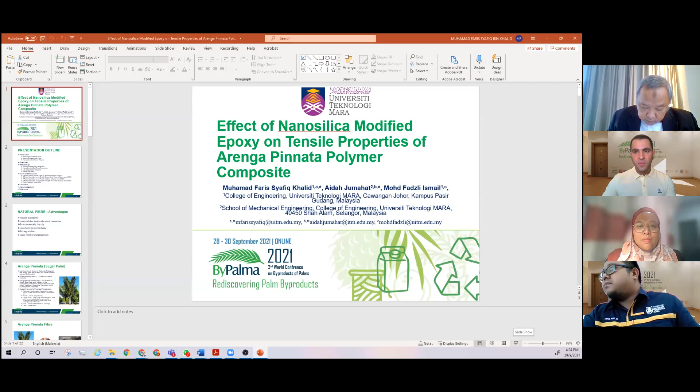Assalamualaikum and good day. My name is Muhamad Faris Syafiq Khalid. I learned about Arenga Pinnata, or sugar palm, also from UPM, Prof. My mentor at first is Dr. Abdul Hakim, who was my student also. Right now he's a lecturer at UITM. And in my master's, my co-supervisor is Dr. Jawahir.

All right, so I will start my presentation. With me is Associate Professor Dr. Aidah Jumahat, she's my co-supervisor, and also my colleague Mohd Fadzli Ismail. So my title is Effect of Nanosilica Modified Epoxy on Tensile Properties of Arenga Pinnata Polymer Composite.

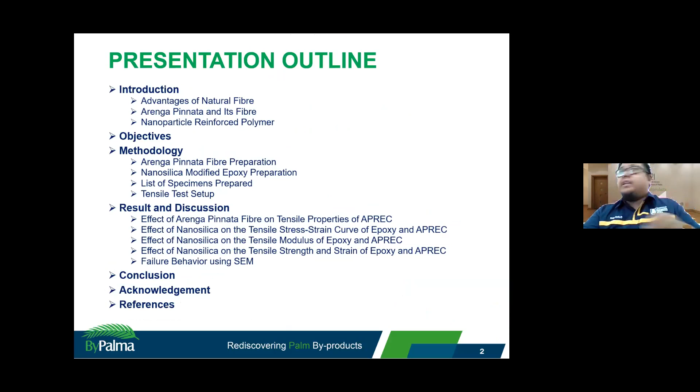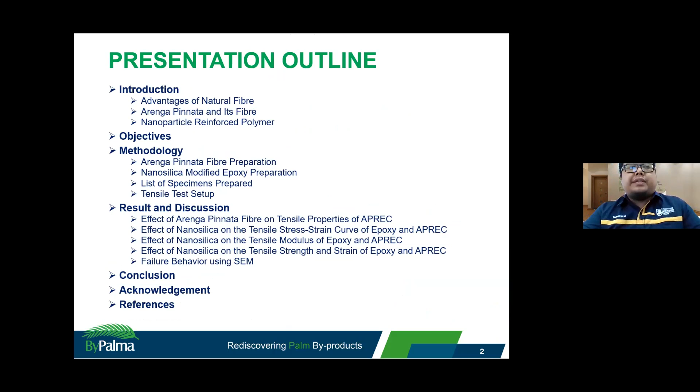This is a little bit on my presentation outline. We will take a look at the introduction, a little bit on the advantage of natural fiber and so on, and then methodology, results and discussion, conclusion and acknowledgement.

I will start my presentation with the advantage of natural fiber. Natural fiber has attracted the attention of researchers and manufacturers since years ago due to the advantage of having abundance of resources all around the world, which allow them to be acquired at low cost. It is also environmentally safe due to its biodegradable nature. It's also less harmful to the human body compared to synthetic fibers such as glass fibers. Besides, natural fiber has good mechanical properties and low density.

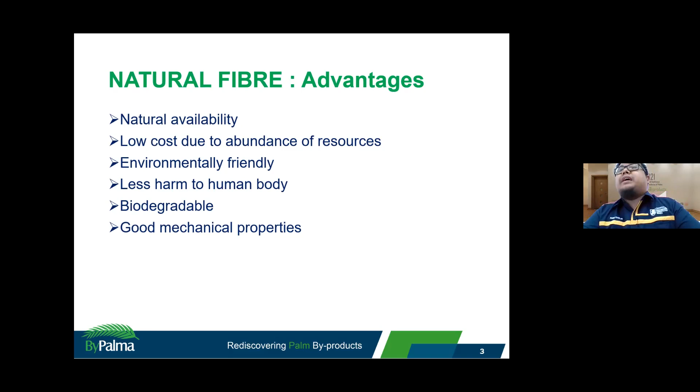On the Arenga Pinnata, it is a tree also known as Enau or Kabung in Malaysia, and popularized by the name sugar palm by UPM. At first I learned about sugar palm, and then it has several names. It is also known as Ijuk Aren, Injuk Anua, and 150 other different names in Indonesia.

It is a fast-growing plant which only needs around 10 years to reach maturity. For geographical distribution, Arenga Pinnata tree can be found from Southeast Asia and Taiwan to the Philippines, Indonesia, Papua New Guinea, India, Thailand, Myanmar, and also in Malaysia.

Some usage from parts of the Arenga Pinnata tree: first from the palm sap, we can obtain palm neera or fresh juice, which can be used to produce sugar blocks or crystal and brown sugar. From its trunk we can get starch to be used as a biopolymer. From its fibers around its trunk, we can get seawater resistant fiber, which we call sugar palm fiber or Arenga Pinnata fiber. It can be used as rope, broom, roof, substitute for geotextile fiberglass reinforcement, and underwater and underground cable.

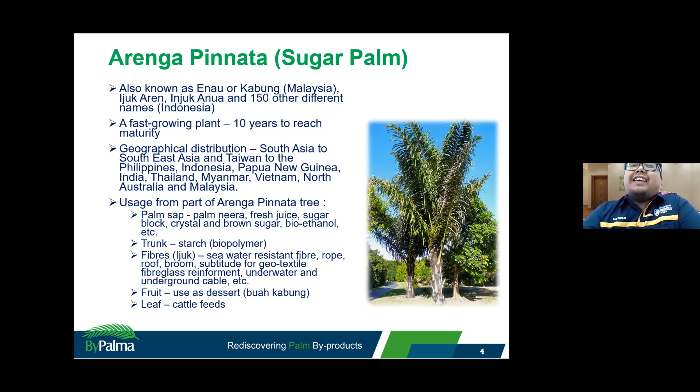From its fruit, we can use it as a dessert. In Malaysia, we call it buah kabung. Usually we put it in a dessert called lychee kang. And lastly, from its leaf, we can use it as cattle feed.

This is the Arenga Pinnata tree. As you can see in the slide, the Arenga Pinnata tree is on the left, and it produces black colored fibers all around its trunk as shown in the zoomed photo. The fiber has been harvested, prepared, and used in this research.

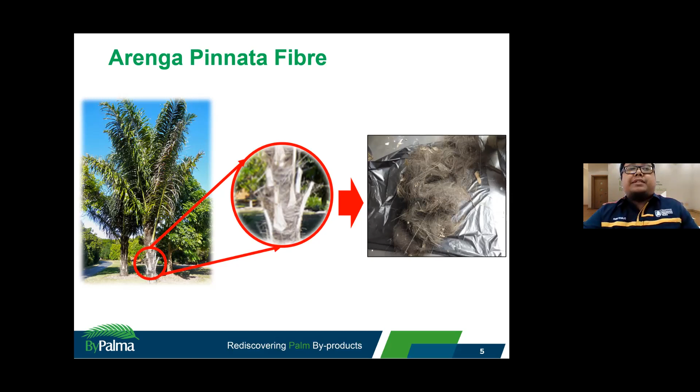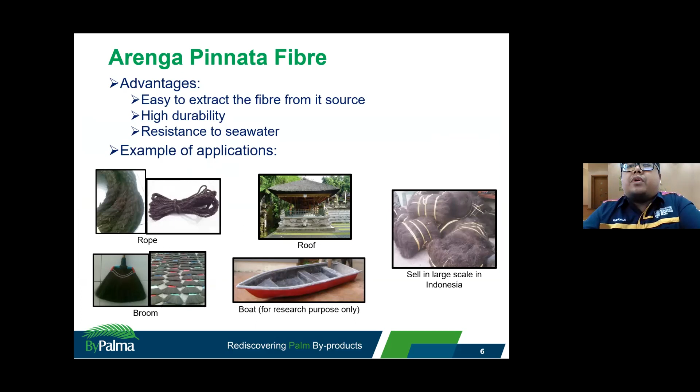Advantages of Arenga Pinnata are mostly known for its resistance to seawater, as mentioned in the keynote speech by Prof. Sapuan. It is also easy to extract the fiber from its source, and it has high durability. For example of application as of now, Arenga Pinnata fiber has already been used as a rope for thousands of years, and the fiber has also been used as roof and broom.

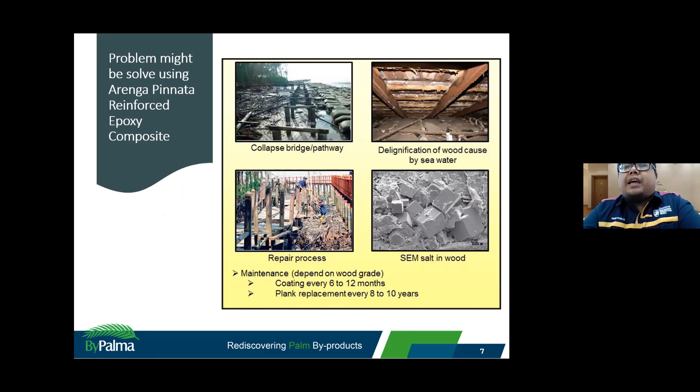So problems that might be solved using Arenga Pinnata fiber polymer composites, such as replacement for construction of wood bridges at saltwater areas because of its good properties. Currently, bridges and pathways made from wood need to be maintained frequently. We need to do coating for the wood around every 6 months to 1 year, and replace the plank every 8 to 10 years.

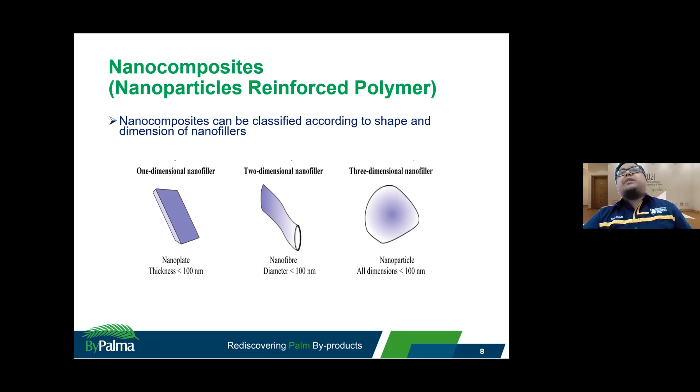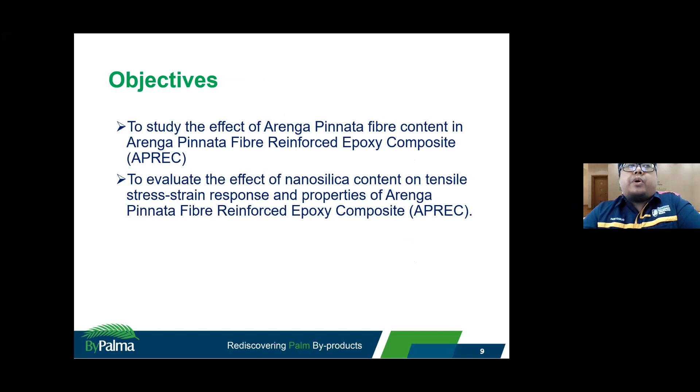For the objectives: first, to study the effect of Arenga Pinnata fiber content in Arenga Pinnata fiber reinforced epoxy composite, which we call APREC; and second, to evaluate the effect of nanosilica content on tensile stress-strain response and properties of APREC.

Arenga Pinnata fiber were harvested from Kuala Pilah, Negeri Sembilan, Malaysia, for this project. The raw harvested fiber, which has not been cleaned yet, contains Arenga Pinnata stick and dirt, as shown in picture B.

The cleaning process started by removing the Arenga Pinnata stick and large dirt from the harvested fiber until only small dirt remained, which is hard to remove by hand. The fiber was then cleaned using tap water to remove remaining dirt and dust. Lastly, the clean fiber was dried under sunlight for about 3 to 4 hours before being placed in an open space under a roof until completely dry.

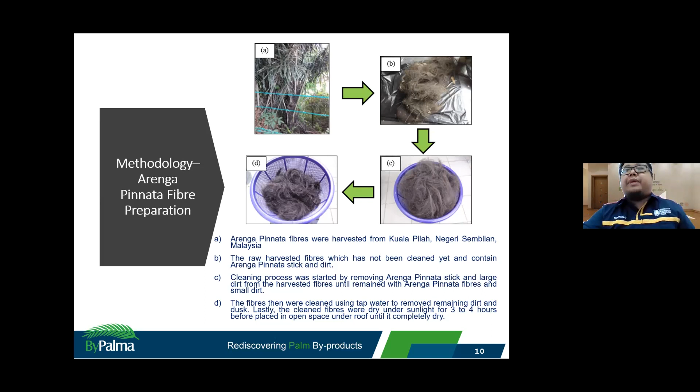It is easier to use Arenga Pinnata compared to Kenaf, as mentioned in the keynote speech before this.

For nanosilica, we are using Nanopox F400 as a modifier for the epoxy. It was supplied by Evonik Industry from Germany in the form of colloidal silica, 40% in epoxy resin. The average size is about 20 nanometers, and the largest one we found is around 50 nanometers.

For production of nanosilica modified epoxy, the Nanopox F400 and epoxy resin were weighted as calculated to get 5%, 13%, and 25 weight percent of nanosilica. Then the Nanopox F400 and Miracast 1517 were poured into glass beakers, and we used a magnetic stirrer at 400 RPM and 80 degrees Celsius.

The mixture was stirred for around 1 hour. After stirring, the beaker containing nano-modified epoxy was placed inside a vacuum at pressure around 0.07 megapascal to remove air bubbles for a duration of 1 hour. This is an important step because nanosilica easily agglomerates inside the epoxy, so we use this process.

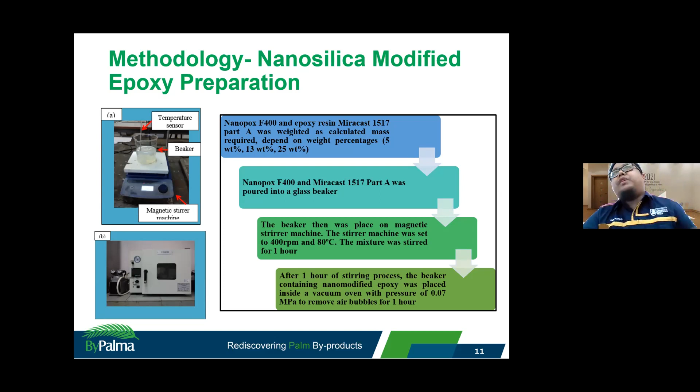This had been proven by my supervisor, Associate Professor Dr. Aida. Next, we move on to preparation of the APREC, or Arenga Pinnata reinforced epoxy composite. For preparation of nanosilica modified APREC, the steps are the same as preparation of unidirectional APREC.

First, Arenga Pinnata fiber and epoxy resin were weighted according to the required volume percentage. Then Arenga Pinnata fiber was aligned in the rectangular mold in one direction. The mold size is 250 millimeters length, 25 millimeters width, and 3 millimeters thickness. We use this mold size to avoid the push from the unidirectional Arenga Pinnata, so we get only a single angle from the arrangement.

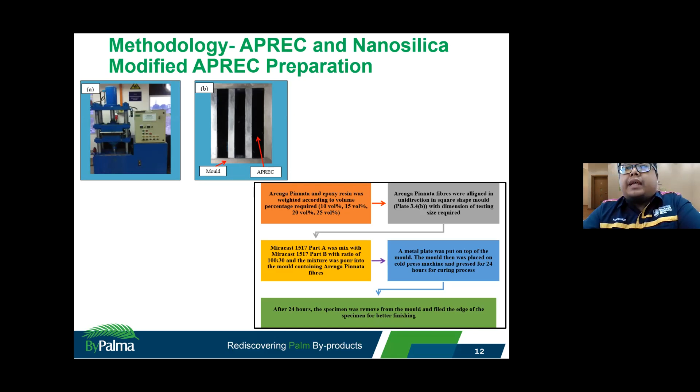After that, the Miracast epoxy was poured into the mold containing Arenga Pinnata fiber, and then we placed a metal plate and put it in a cold press machine, pressing for around 24 hours for the curing process. After 24 hours, the specimen was removed from the mold, and the edges were filed for better finishing. This is the specimen produced for this study; I have around eight types of specimens for this study.

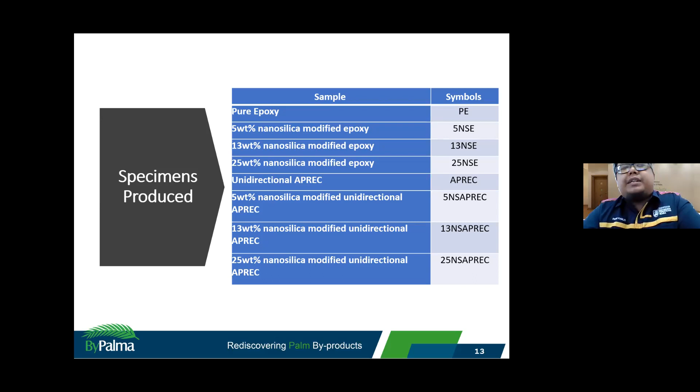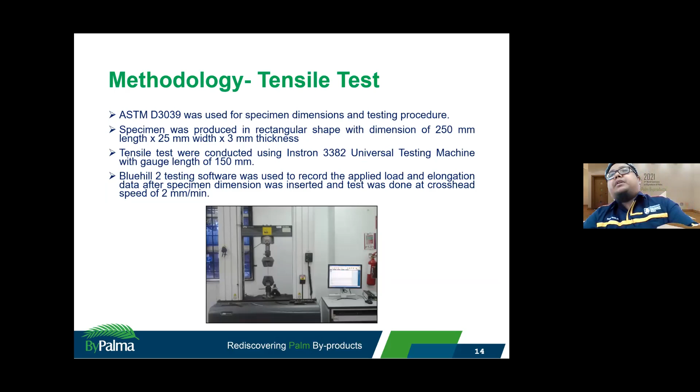We have a pure epoxy, nano-modified epoxy, and also unidirectional APREC and nano-modified unidirectional APREC. For the tensile test, we are using an Instron 3382 universal testing machine with gauge length of 150 millimeters, following ASTM D3039. The crosshead speed is around 2 millimeters per minute.

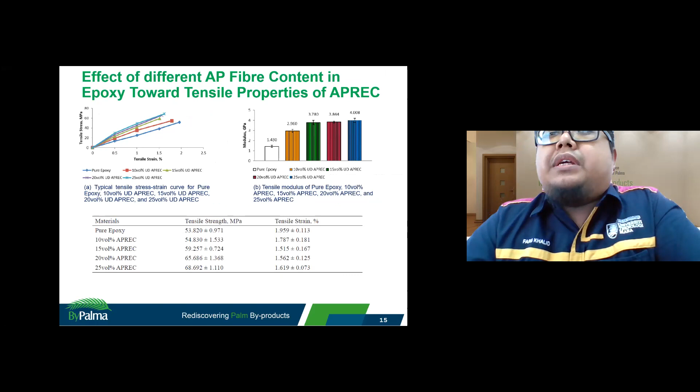Okay, so this is the result. Before we go to the result on the nano-modified, first we need to take a look on the Arenga Pinnata, or we call it APREC. We recap a little bit how and why we use 25 volume percent of APREC to produce the nanosilica modified one. This is the reason. Actually this result was already presented in Pertanika Journal, from UPM, Pertanika Journal of Science and Technology, volume 25. This is my research in 2017.

From the result shown in the slide, 25 volume percentage APREC gives the best tensile properties, which increase 180.28% of tensile modulus and increase 27.63% tensile strength, compared to pure epoxy specimen. So that's why we are using 25 volume percent for further on our nanosilica modified APREC.

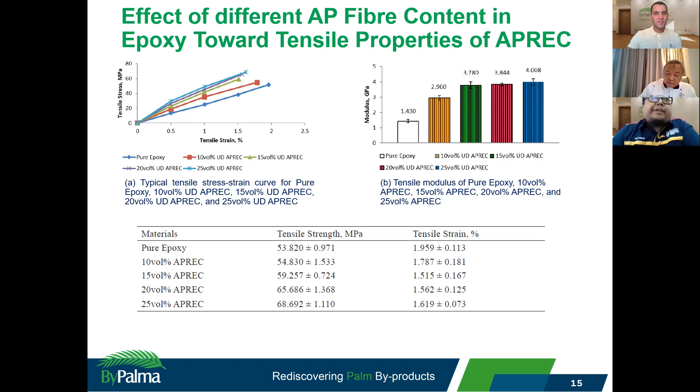All right, so after we place the APREC, we get the result. This slide shows a typical tensile stress strain curve for pure epoxy.

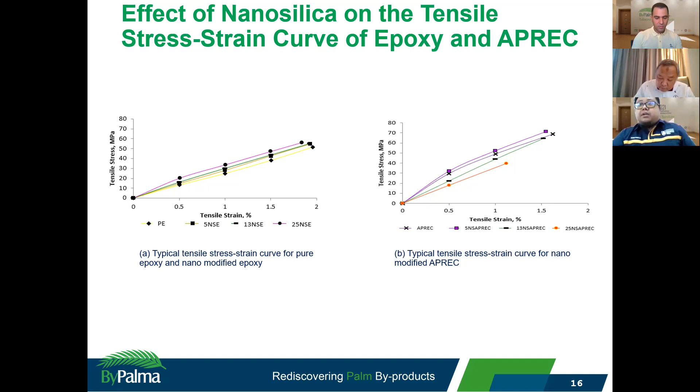After we further use 13 weight percent nanosilica and 25 weight percent nanosilica embedded in the composite, the tensile properties of the specimen reduced. And then for the modulus also shows the same, as you can see.

For the specimen without Arenga Pinnata, you can see the improvement on the resin, on the epoxy itself, increasing from pure epoxy to 5, and then increasing at 13 and also 25. But when we use with APREC, it only increases up to 5% nanosilica content in APREC. Why does this occur?

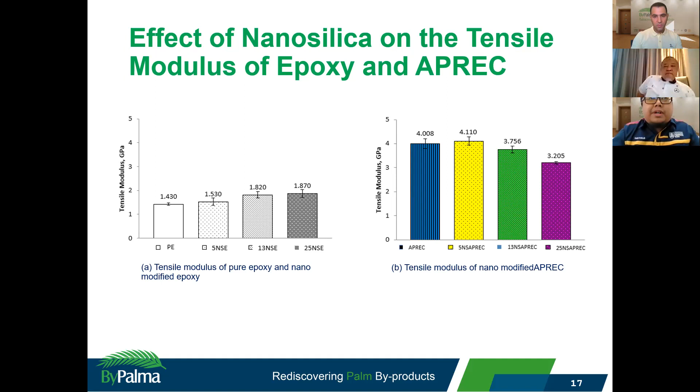It is because we can see in the scanning electron microscope later on. But before that, I want to show you a little bit on the tensile strength. It also gives the same result as the modulus, as you can see, only up until 5%. You can see the increment of the tensile strength, and then after we include up to 13 and 25, the strength becomes reduced.

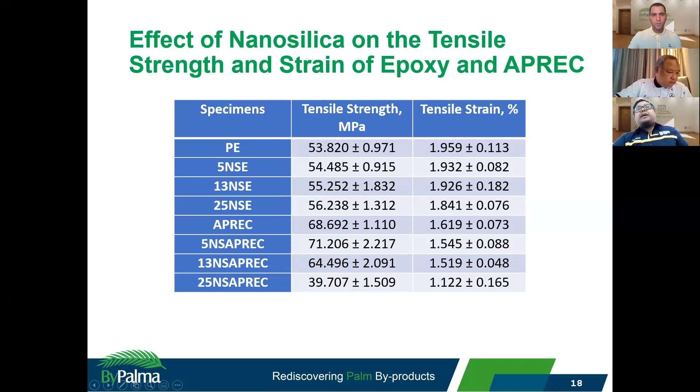From the previous slide, we can see the addition of 13 and 25 reduces the properties. This reduction in tensile properties occurred due to high reinforcement content, high content of Arenga Pinnata and also nanosilica inside the composite, after we add 13% and 25% nanosilica. This had caused epoxy resin to not perfectly coat the Arenga Pinnata fiber. This phenomenon, we call improper wetting.

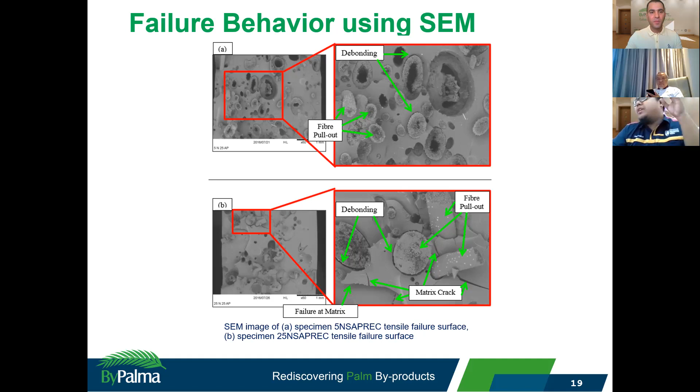So actually, I want to show you that the addition of further than 5 nano weight percent for this project will reduce the properties.

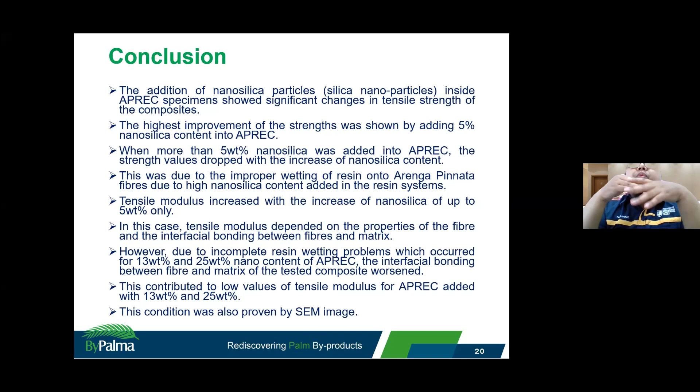As for the conclusion, I can say that if you want to add more nanosilica or nano content inside this Arenga Pinnata epoxy composite, maybe we will try a different method, maybe using vacuum bagging, so that the higher viscosity epoxy that we embedded with nanosilica can flow inside and bond with Arenga Pinnata. That's the conclusion that I made.